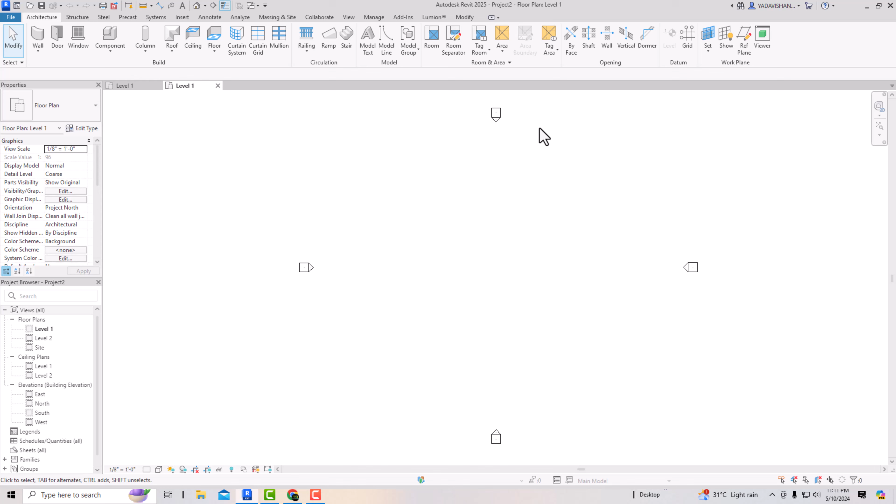If you click onto stairs and look at this definition here, it says: add a stair to the building model by creating common run, landing and support components. So I'm going to click onto these stairs, and I am at level 1 and level 2. There are only two levels here, and this one is site.

If you look at the components of a staircase here, the first one is run. The definition of run is that it creates a run of a stair by specifying points. So you can specify points to draw this staircase using run. This one is to add a landing in your staircase, and this one is to create a stringer or carriage by picking an individual path on a run or landing. So this one is to draw support.

In components we can find a straight staircase - how to make a straight staircase - and this one is full step spiral staircase, and this one is center-ends spiral, and this one is L-shape winder, and you can see here U-shape winder. So this is by default the components of staircase.

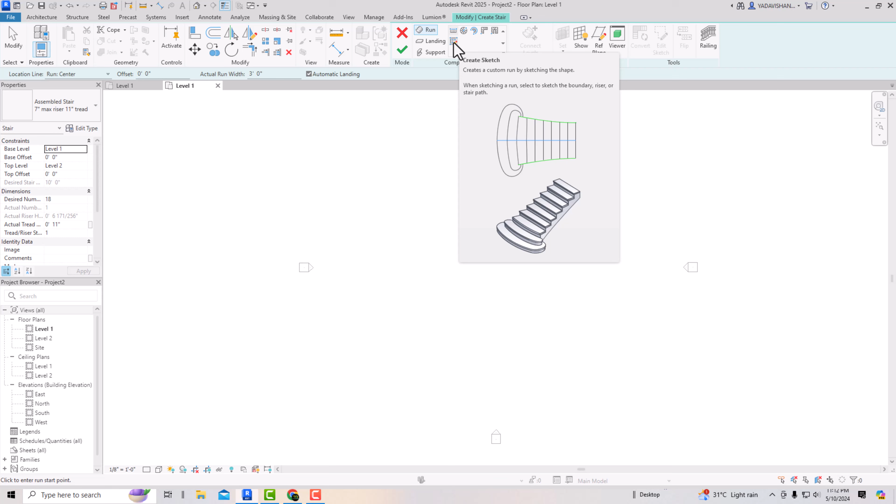And now the last one is create a sketch. So you can use this to customize your staircase using staircase by sketch.

Now I'm going to properties here, and you can see on the left side this one is assembled stair, 7-inch max riser, 11-inch tread. So you can find in properties there are some types of staircase. This one is assembled stair, and you can see here there is a monolithic stairs, and this one is precast stair, that means RCC staircase you can say, and this one is monolithic.

So both are almost same, but this one is like if you want to draw any assembled staircase of wood material or steel, you can use this one. So we will understand each one, and now I'm going to select this one only, assembled staircase, and you can see this is the base level 1 and top level is level 2.

So that means from level 1 to level 2 I'm going to draw a staircase. And if you look at the base offset here, this one is by default 0 feet 0 inches, and top offset is also 0 feet 0 inches.

So you can see the desired number of risers is 18. This is the desired number - this much of riser will be required by using this setting, 7-inch riser and 11-inch tread to reach to level 2. And you can see here actual tread depth is 11-inch.

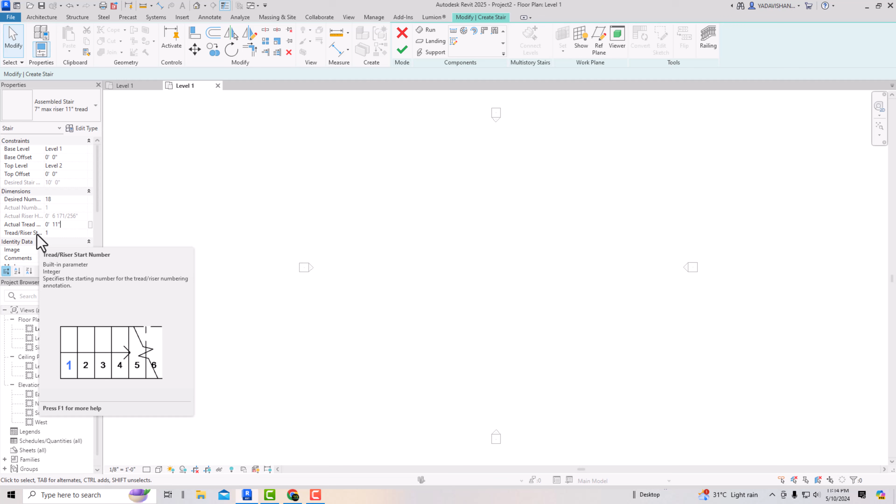You can change this here - you can make it 10-inch, you can make it 1 feet - and this one is tread riser start number, so this start number will begin with 1. So this is the settings of the properties of this staircase.

So now I'm going to select this assembled staircase, and I'm going to use this straight option to draw my staircase here. So I'm going to select this one, and now you can see this one is mode - finish edit mode - and this one is for cancel edit mode. So you can use this when you finish drawing a staircase.

And you can see here this multi-story staircase is not activated - I will tell you how to activate this. And you can see this last one, you can add railing if there is no railing in your staircase, but by default railing will be there. So later on also you can add railing.

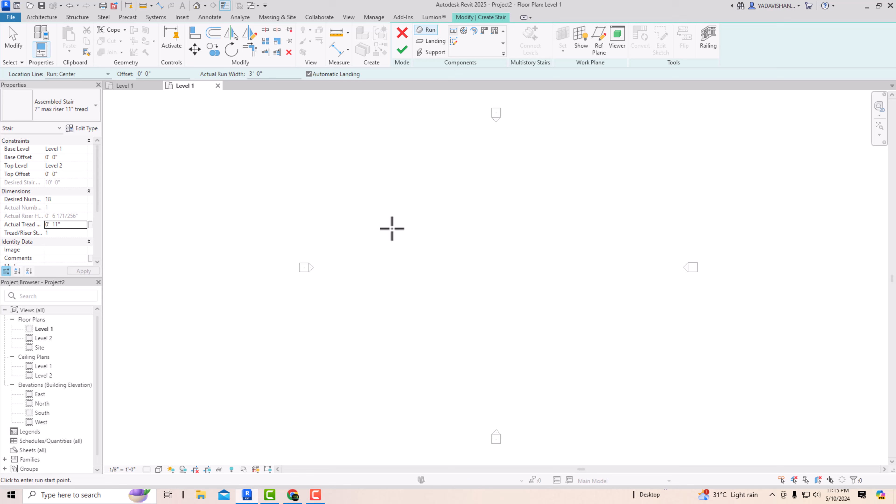So now I'm going to click with my left mouse anywhere in my viewport, and you can see here, if I zoom in, whenever I'm moving my mouse forward or backward, you can see the riser number is also increasing or decreasing. So you can see 8 risers created, 10 remaining.

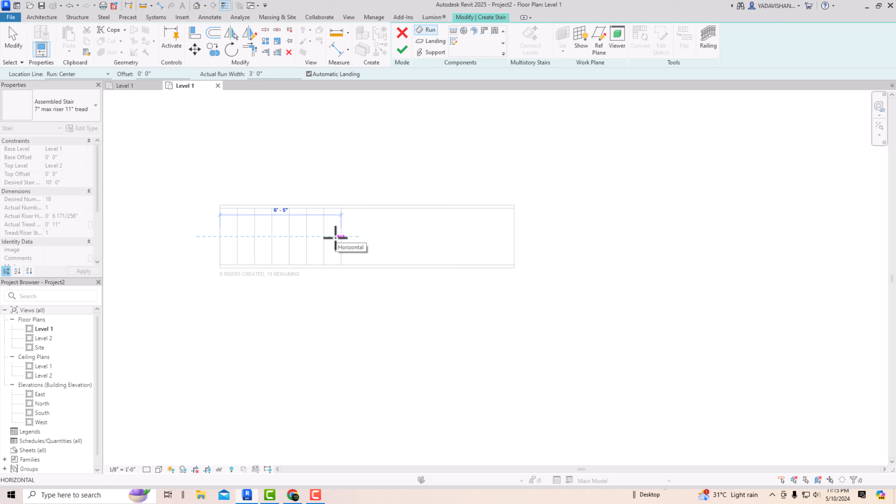You can see in this gray text in the down of this sketch here, 8 risers created, 10 remaining. And you can see if I finish this, the desired number of 18 risers is created, 0 remaining.

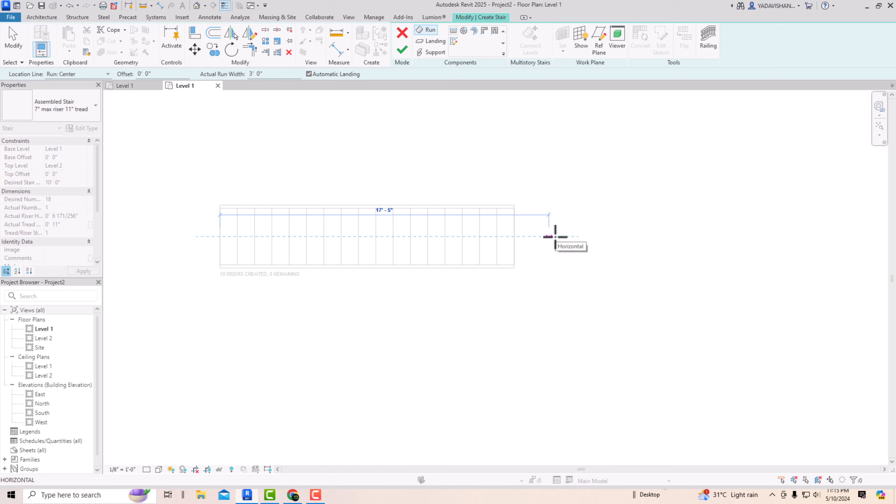So now you are about to finish this staircase. With the left mouse click, click outwards, and you can see this staircase is drawn. This is the assembled staircase. After that, use Finish Edit Mode, and your staircase is drawn.

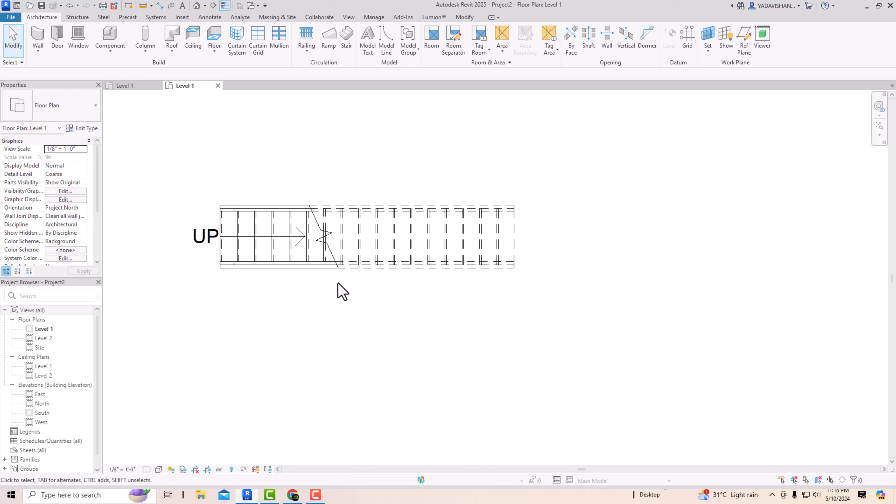Unlike AutoCAD, you are not required to draw this eye level line, so it is found automatically in Revit. This is for the section of the staircase, and after eye level this line should be in dashed line if you are studying architecture.

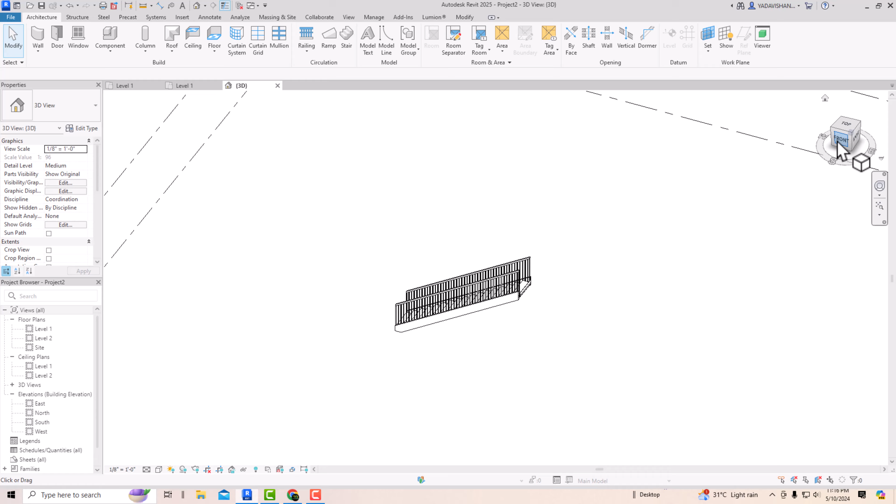So I'm going to my default 3D view, and you can see here this is our assembled staircase. You can view it in realistic mode also. This is our assembled staircase.

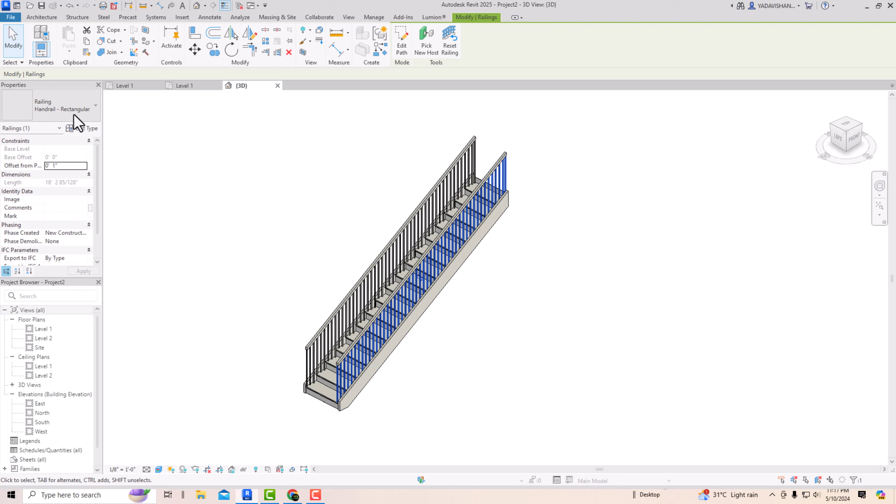Now you can remove this railing also if you want, or reset this railing, and change the railing style here if you want any other railing pattern. If you want a guardrail, you can use this guardrail also. Likewise, you can change the railing or delete it.

If you want to make any edit in your staircase, you can select from any view in the plan, 3D, or elevations, and change the settings there. Now you can go to Edit Type, click here, and you can see some parameters of the staircase.

Riser height is 7 inches, depth is 11 inches, and run width is 3 feet. By default you will find this, and you can see in calculation rules also there is an edit here, and you can calculate how much riser is required.

I will leave this, and you can see here construction run type: 2 inch tread, 1 inch nosing riser. If you click onto these three dots, you can change the tread material and riser material.

Suppose I'm going to change the tread material and riser material, but for that I'm going to create a duplicate here, a new assembled stair. This will be easy to work with in Revit. So always remember, just create a duplicate of anything if you want to change the Revit default models. This will avoid any confusion.

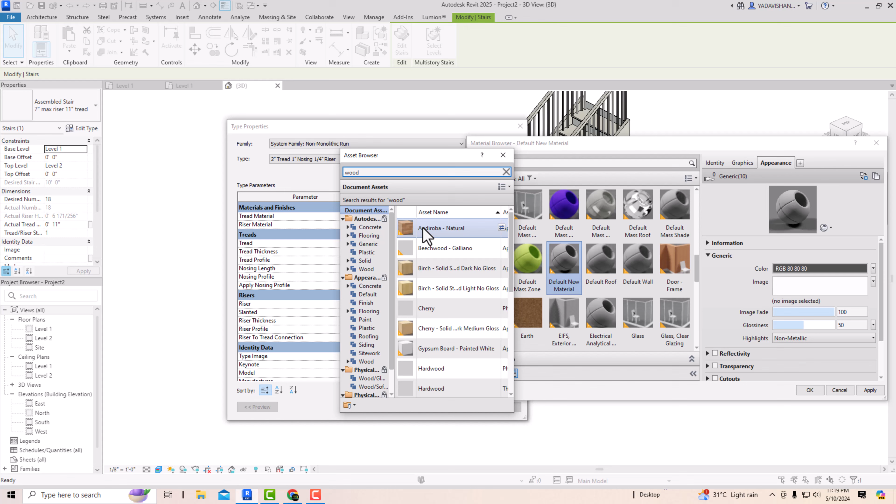I'm going to By Category, click on the three dots, and go to create a new material. I can go to the asset browser and type, suppose I want wood here, so I'm going for wood. You can select any wood material here, and I'm going to apply OK.

You can also change the riser material. I'm going to use the same material here, apply it as the riser material also, and you can see your material is changed here.

Now you can see here tread is ticked. If you uncheck this, the tread will disappear and you will not find it. So you can check it again and click Apply, and you will find the tread.

You can also change the tread thickness here. This is by default 2 inches; you can change it to 3 inches, 1 inch, anything. You can also change the tread profile here.

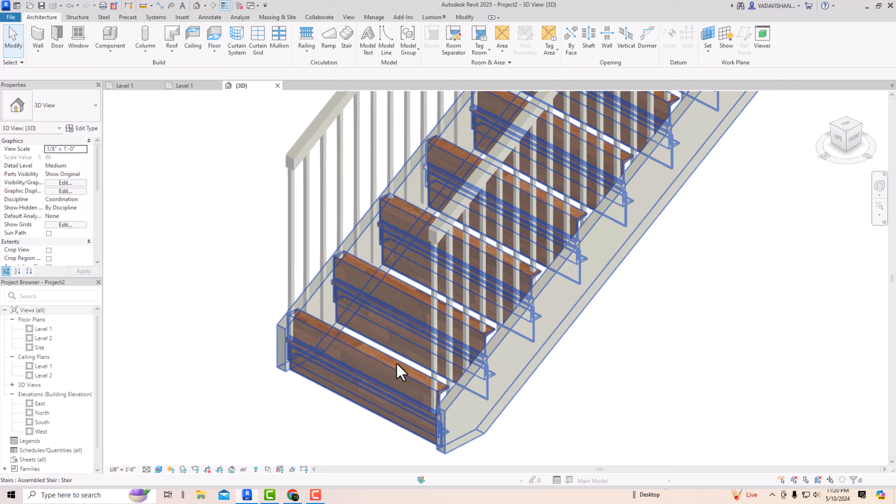This is the default, and if you click on this drop-down arrow, you can select any profile here. This one is C8X15. If you look here, the tread profile will be changed. You can see this tread profile is changed here; this is the C profile. I'm just showing you how to use this tread profile.

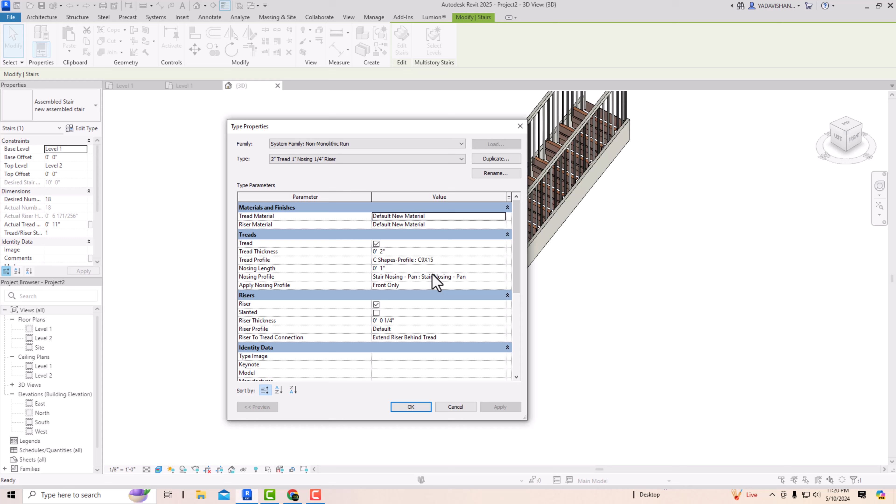You can also move to undo, undo again, and change this. Select this staircase and go to Edit Type, and you can see this is the new assembled staircase. You can simply change the tread profile here. I'm going to make this the default, click Apply, and this one will be default.

Now we can also change the nosing length here. You can make it 1 inch, 2 inch, depending on your design. You can see this is the nosing profile here; this is the nosing. The stair nosing is a pan here. You can make it C8X15 also, and set it as default.

You can also insert your own families here. If you learn advanced Revit, you will come to know how you can insert a nosing profile, and apply nosing profile front only. If you select this arrow, you can apply it to front and left, front and right, or front, left and right. I'm going to select front, left and right, then click apply.

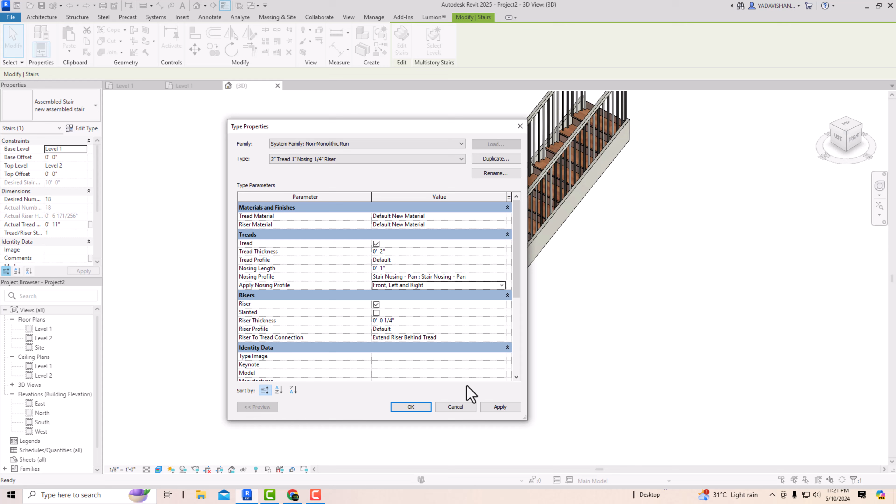So nosing will be applied to all the front here, and backward also you can see nosing is applied here. So if we move this here, you can see it is applied everywhere.

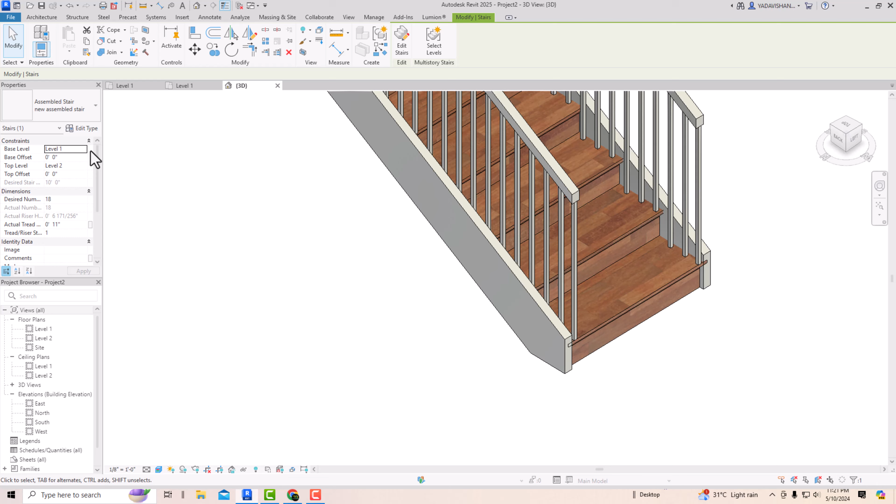So if you want to make any other settings here, you can go to edit type, and you can see support here. So you can increase or decrease the support. The right support is stringer closed.

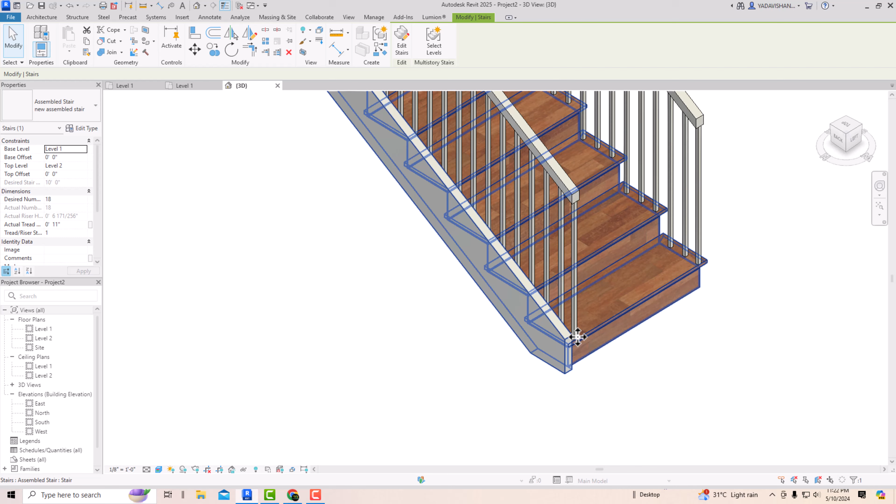I'm going to select this, and you can select carriage open, click apply, and you can see this is open. You can also select none, so none will be selected here, and there is no stringer. So again I'm going to edit type, select this staircase, go to edit type, and you can see right support is none.

So I'm going to make this again the same, stringer closed, apply. In the right support type, stringer 2 inch width, you can always change this. Section profile is default, and you can select this C profile here if you want, and this one will be changed to C profile.

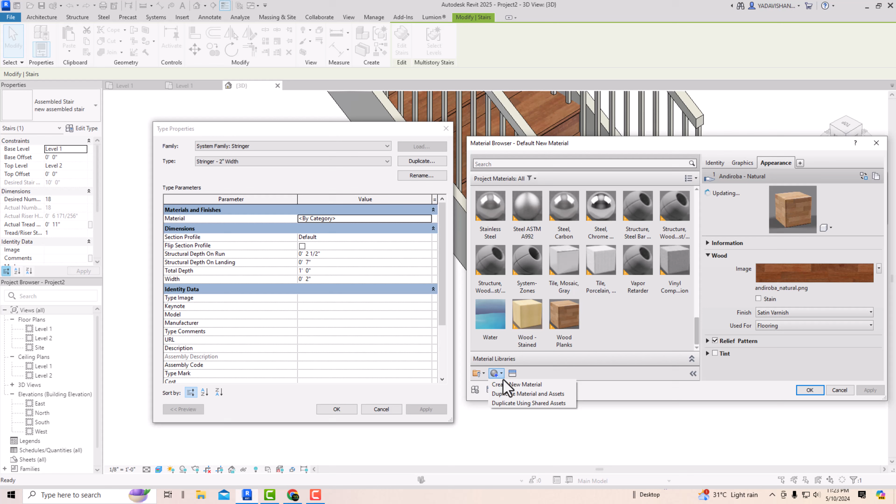You can also make this as default here. You can change the material. So suppose I'm going to change the material of this support here, the stringer. I'm going to create a new material, go to asset browser, and now type steel here, so I want steel support here. We can select any color of steel, click apply, and you can see this is changed here.

Likewise you can change the structural depth on run, and total depth here, width here, and you can also use this flip section profile. You click apply, and this one will be flipped here.

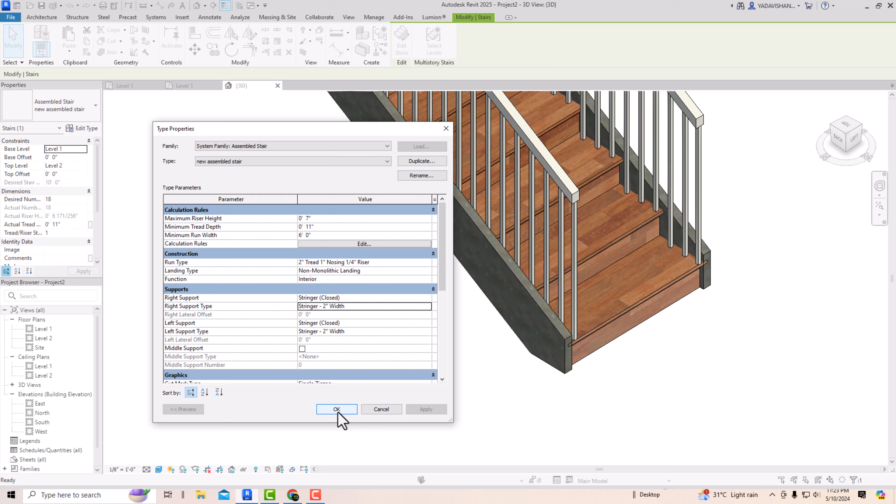Likewise you can use these settings for all staircase designs here in Revit. You can use the same techniques of changing tread and riser, materials and railings, and profile and nosing. So this is about how to draw an assembled staircase.

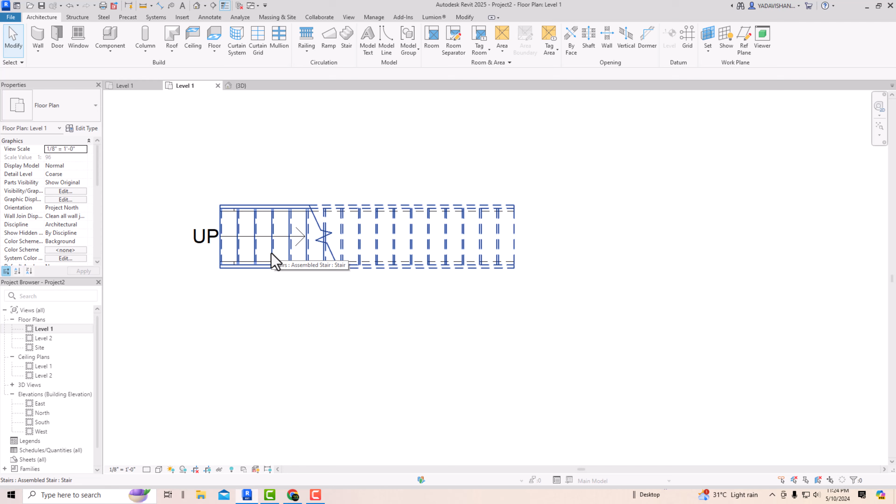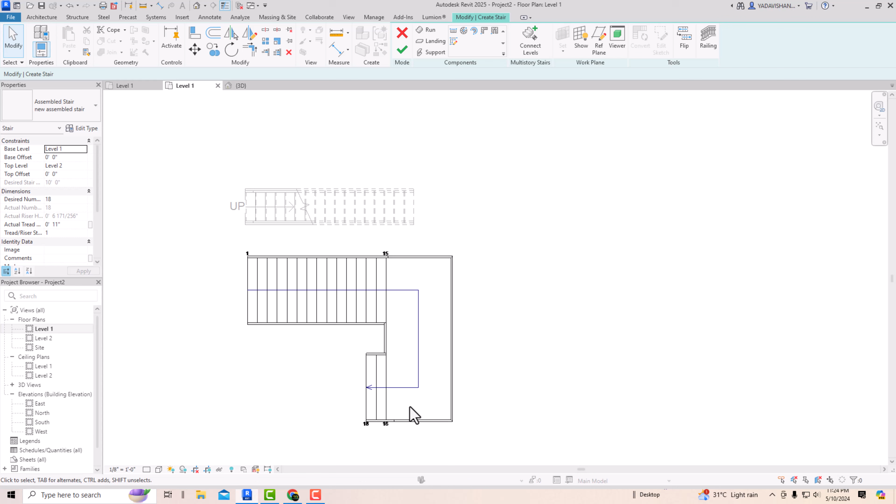Likewise you can go to stair again, and try to draw this new staircase here, a new assembled staircase, and you will find the width of the staircase is changed here. You can draw any shape here. Suppose I'm going to start from here, and this is the pattern I'm going to draw. I'm going to finish this, and you can see this is a change in design.

Likewise you can practice this assembled staircase, and you can draw any other shapes also. You can change the width and thickness.

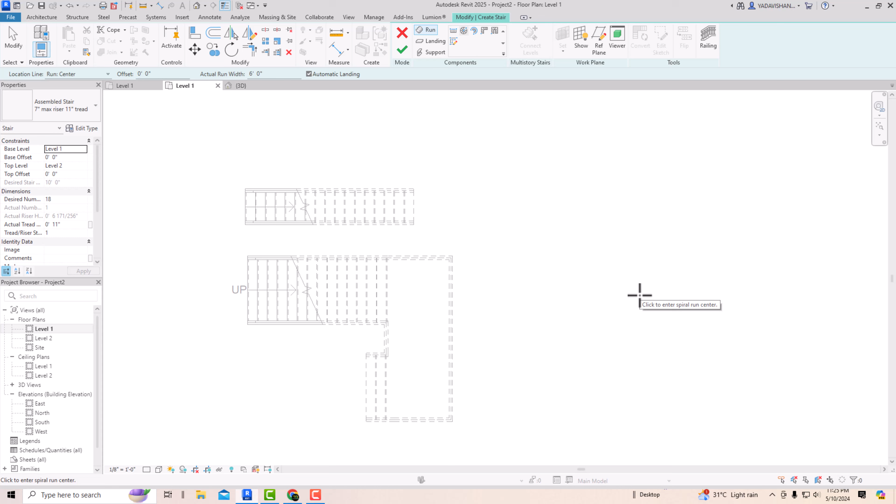So next you will see here, this one is a full step spiral staircase. I'm going to again select 7 inch or maximum riser, 11 inch default here, and go from level 1 to level 2. Now I'm going to select this full step spiral staircase, and select onto this any point here, and if you increase and decrease, you can see 18 risers created, 0 remaining, and you can draw this as per your design anywhere.

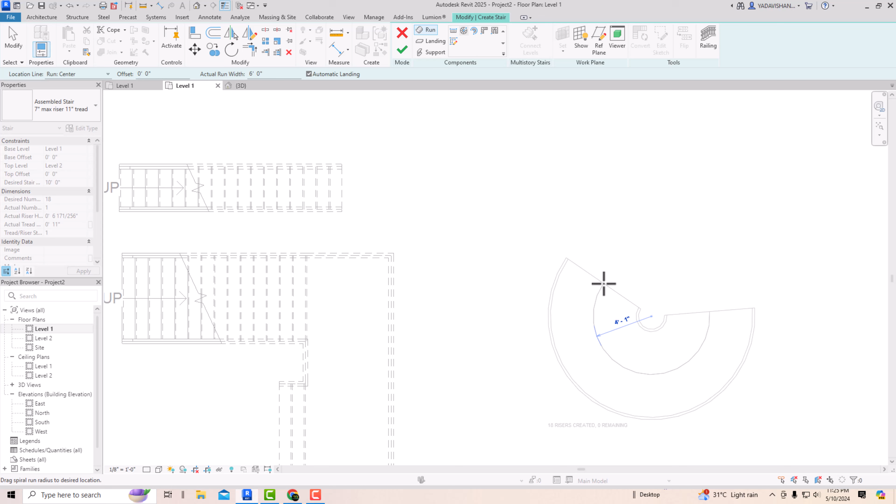So you can increase or decrease this radius here. You can see this radius is guiding us, so how much radius you want for your spiral staircase. I'm going to use this one, 4 feet 1 inches, and now I'm going to click once more. You can see our spiral staircase is drawn here.

Go to finish edit mode, and if you go to 3D view, you can see this is our spiral staircase drawn here, and it is using the same material of tread and riser.

You can do some more settings in this spiral staircase, so I'm going to select this spiral staircase, and go to edit type, and you can find this middle support here. You can also give middle support to this staircase, just select this, and if you select middle support, now it is asking for the middle support type.

So this carriage 2-inch width. If I'm going to click apply, okay, so if you'll see middle support here, you can see this is the 2-inch middle support here. You can find this middle support, so this is called middle support. And also you can select this here, and go to edit type, and you can change this.

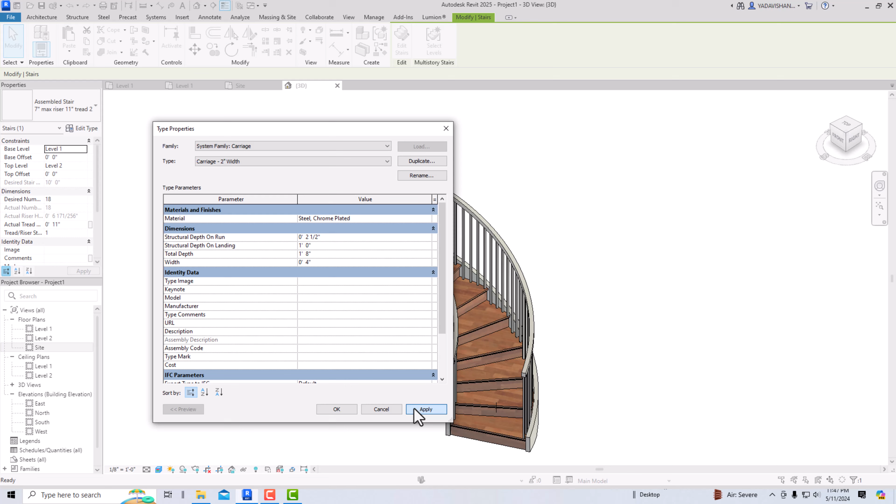You can change the structural depth on run, the structural depth on landing, and also change the material. Suppose I make the material steel, and for structural depth I make this 1 feet on landing. Total depth I make 1 feet 8 inches, and width I make 4 inches. This is just to make you understand. I'm going to click apply, okay. So you can see this is changed here - 4 inches, and 1 feet depth at landing. So likewise you can do these settings.

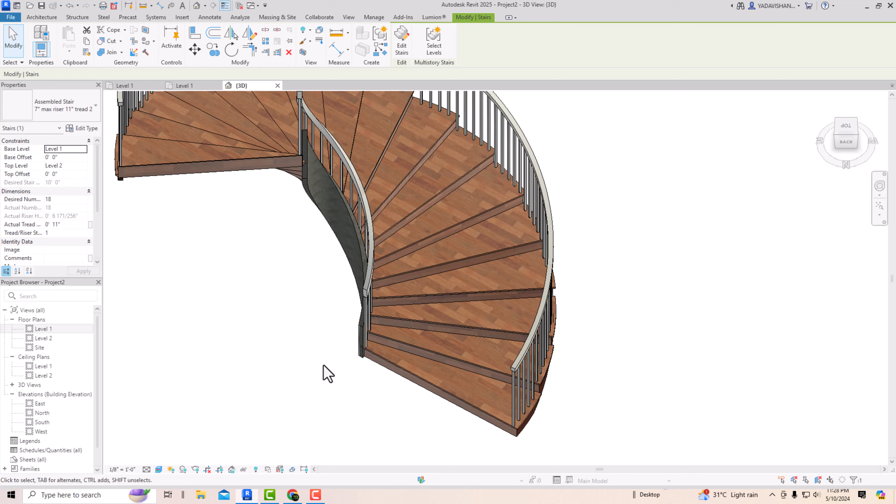Now I'm going to the next one, this is center end spiral. This creates a spiral by specifying the center point, start point and end point. So you can find the center end by specifying a center point.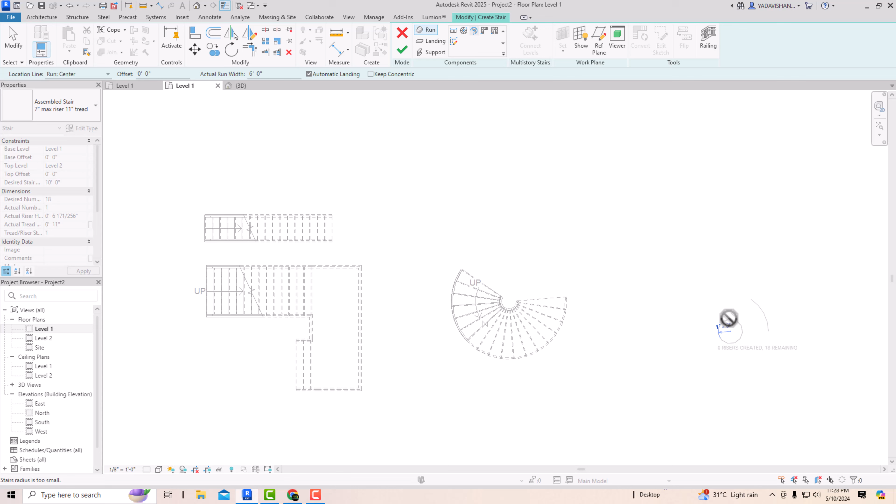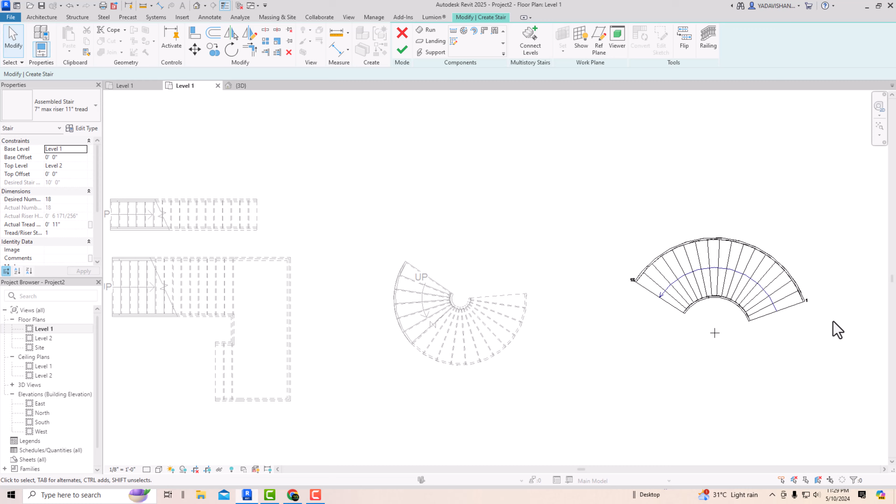Suppose I'm taking this as a center, and now I'm going to find a center here. So I'm going to find a start point here. Suppose I'm using this as a start point from the center, it is 7 feet. I'm going to click onto this, and now move my mouse to the left side, and you can see 18 risers created, 0 remaining. Just click once more with the left mouse, and you can see this is created - the center end arc staircase.

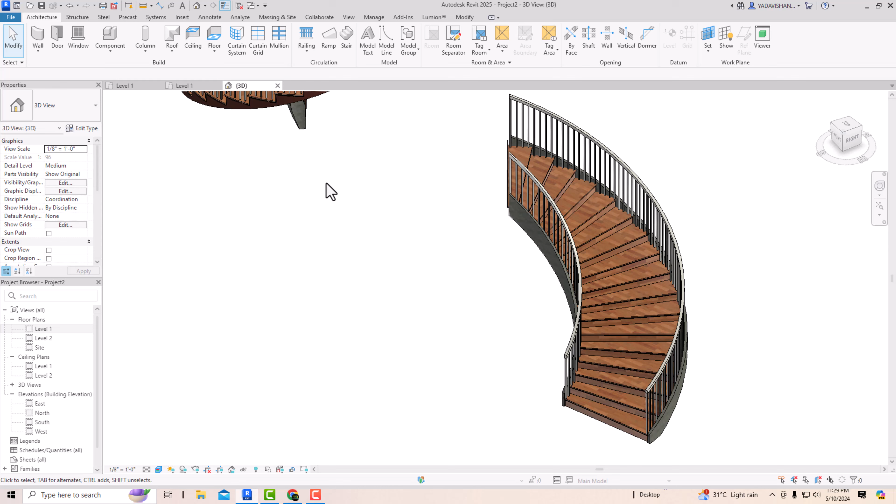You can just finish this, and go to 3D view, and you can see here this is the center end arc staircase. So you can use this in your design to make a beautiful curved staircase, the center end arc.

So next you can see here this setting is almost same here. You can create a duplicate and do these settings. This is almost same here.

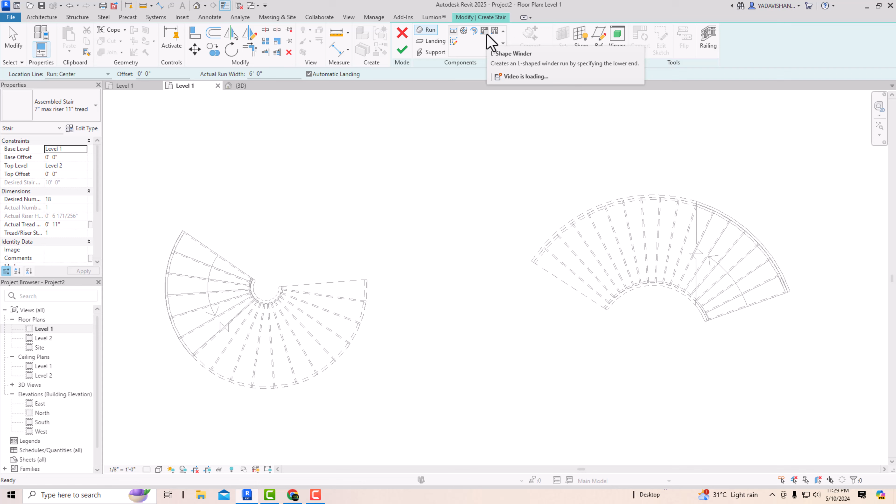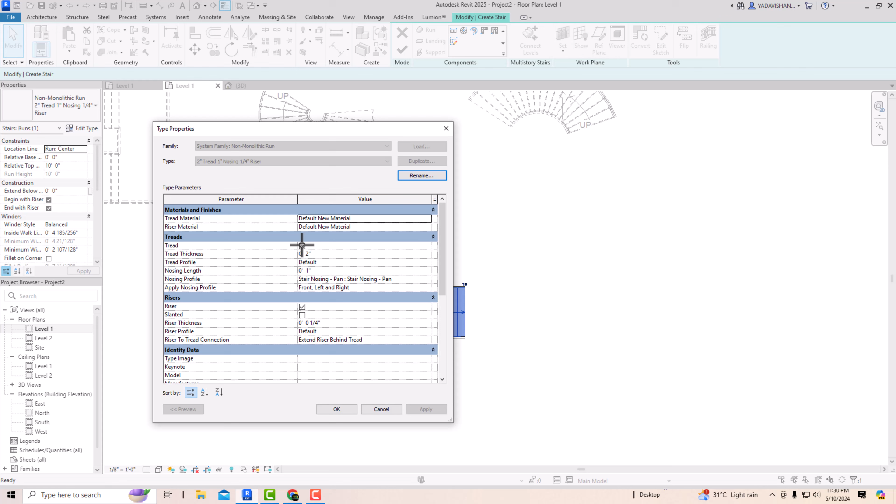So now I'm going to this staircase again, and you can see here L-shape winder. I'm going to select L-shape winder here. This is one is default. So you can do these settings here - you can edit type, create a material for tread and riser, you can change this, you can hide the tread if you want, and the rest of the setting is same. So you can use this in your design.

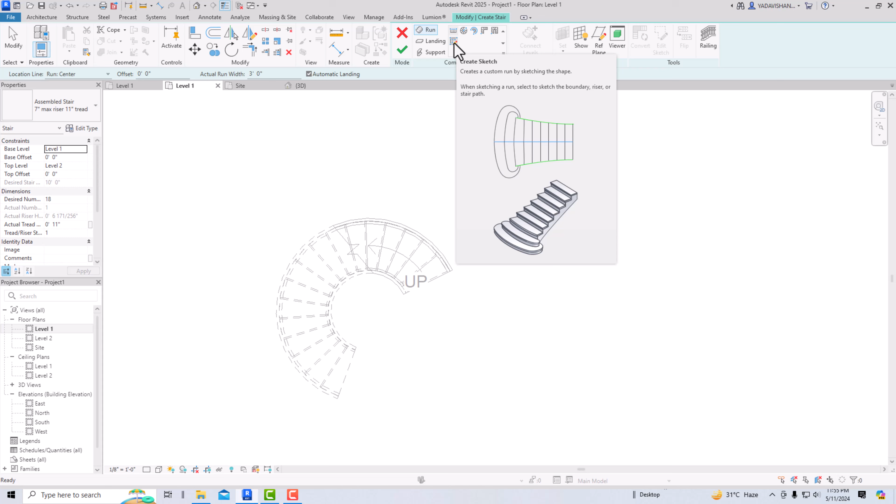So now I am going to start with how to draw a stair by sketch. If you go to stair here, you can see this term - stair by sketch, this pencil icon. If you select here, you can use this to create a sketch of a staircase, and it will use to make a custom staircase. So I'm going to select this.

Now you can see there are 3 terms. Boundary is the first one - sketch line to define the boundary of a run of a staircase. So if you are drawing boundaries, you can start drawing risers, and if you are drawing risers, you can start defining your boundaries. Riser is used to draw riser, and this one is to define the path of a staircase. Without this you cannot draw a staircase in the sketch method.

So I'm going to first select riser here. I'm going to start with riser. You can see this is the non-monolithic run, 2-inch tread, 1 inch nosing, 1/4 inch riser. You can see here relative base. You can do these settings later on.

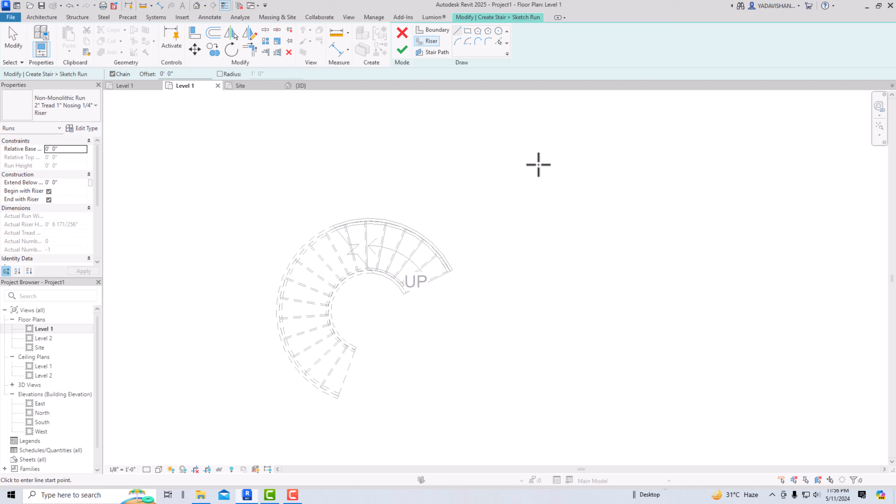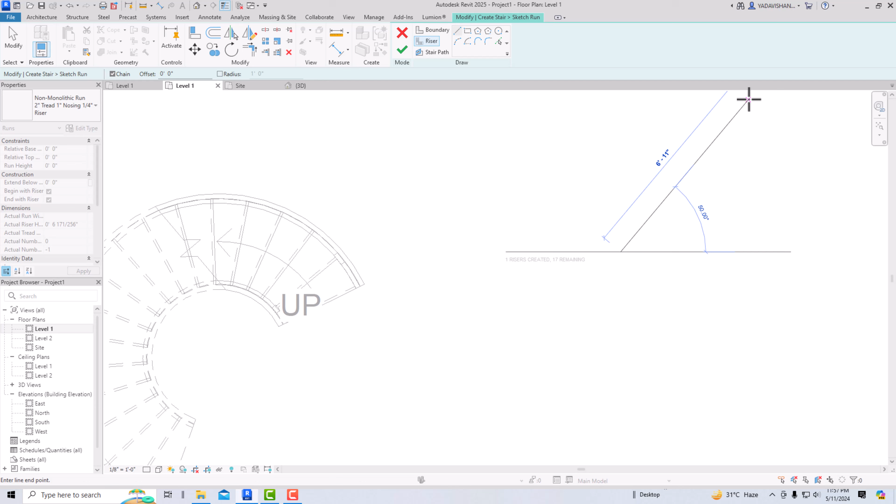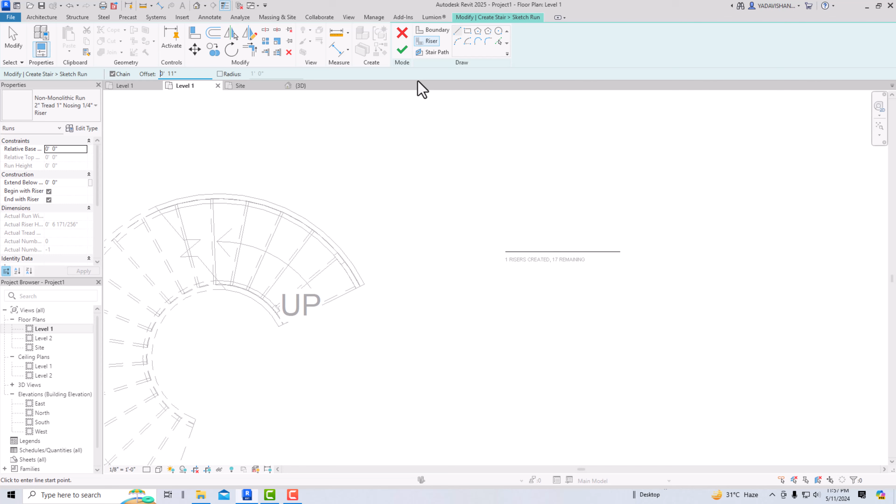So now I'm going to use this riser again. You can select riser here. Make sure every time riser is selected, otherwise by default the boundary will be selected. So you are required to make sure riser is selected, and you can see here offset is 0 feet 0 inches. I'm going to give a riser offset of 11 inches, which is standard. Now we can use this offset here - just make this offset of 11 inches, and you can start making offset here. So however much riser you want, you can start drawing. We are requiring one riser created, 17 risers remaining, so total 18 risers we are required.

So I'm going to go 1 2 3 4 5 6 7 8, and now I want landing here. For landing I'm going to give an offset of 4 feet here. I want a 4 feet landing, so I'm going to draw a 4 feet landing. Because this is a staircase by sketch method, you can make your custom riser and landing here.

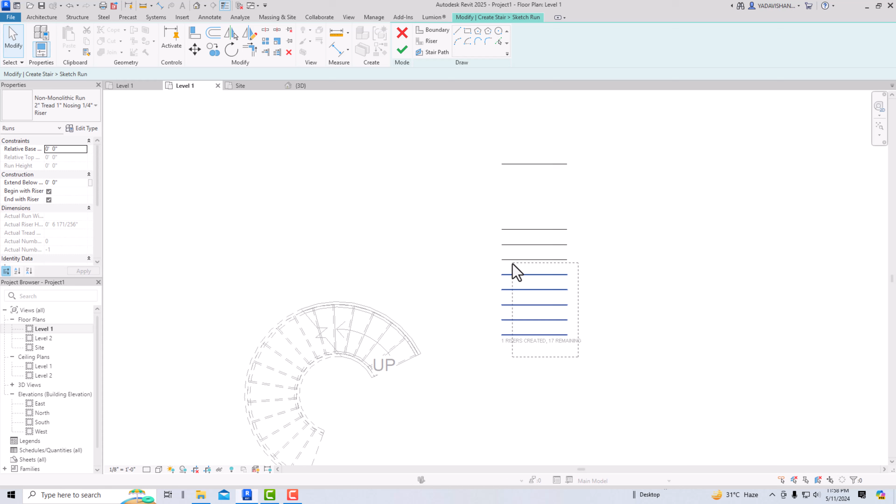Suppose I'm going to mirror this. I'm going to select this, or you can move this also. I'm going to copy this, and I will move this to this place. So I want a gap of 1 feet 2 inches. That is okay.

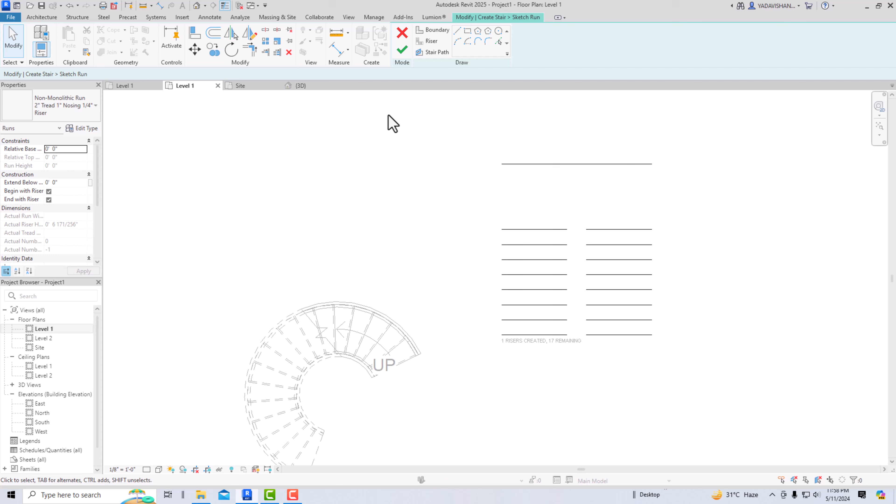So now I am going to use this till here. You can see here, so now we are ready to draw our landing. First we will start with the boundary here. I'm going to select boundary, and now I'm going to define the boundary of this staircase. We will start drawing boundaries.

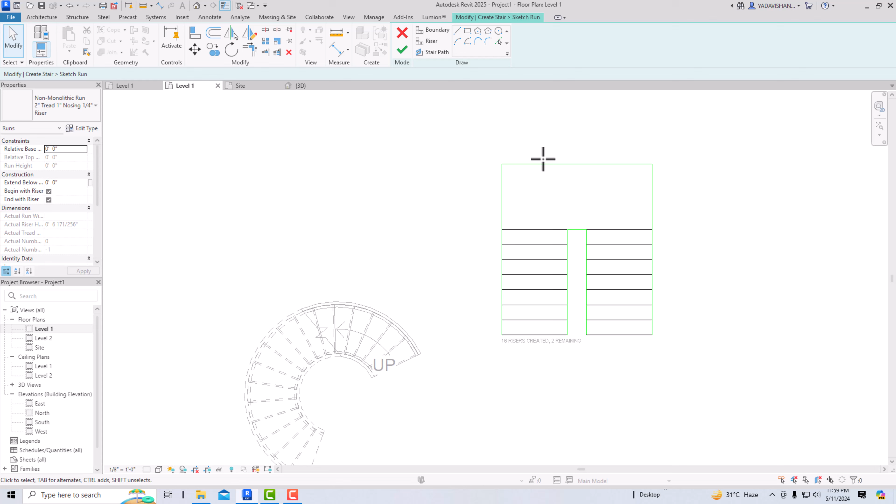And you can see here this is landing. I will just delete this riser here because we don't require it, and we'll draw a boundary here. So I just wanted to confirm that this is 4 feet. This is the boundary, this is the riser in the black line. This is used to draw a riser, and if you see a green line, this is for defining boundaries. So the next important step is that you are required to draw a stair path.

I'm going to select this, and now I'm going to draw a stair path. I'm going to take this till here, then from here, and then here. So now I'm going to finish edit mode, and you can see here this staircase is drawn here. So you can see this is a staircase by sketch method.

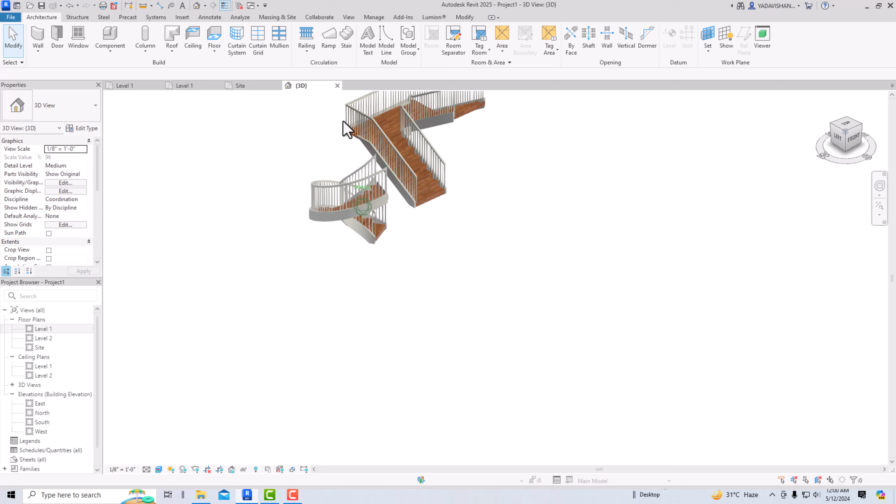So if you look at this 3D view here, this is our staircase by sketch method. Likewise you can draw any staircase using a sketch method, and you can do some more settings. This video is getting longer, but it will give you benefits for the long term.

So I'm going to select this staircase, and now if you want to edit again, how will you do this? I'm going to select this staircase, and you can see here edit stairs. You can also select levels for multi-story stairs. I will come to that later here. So you can change here also.

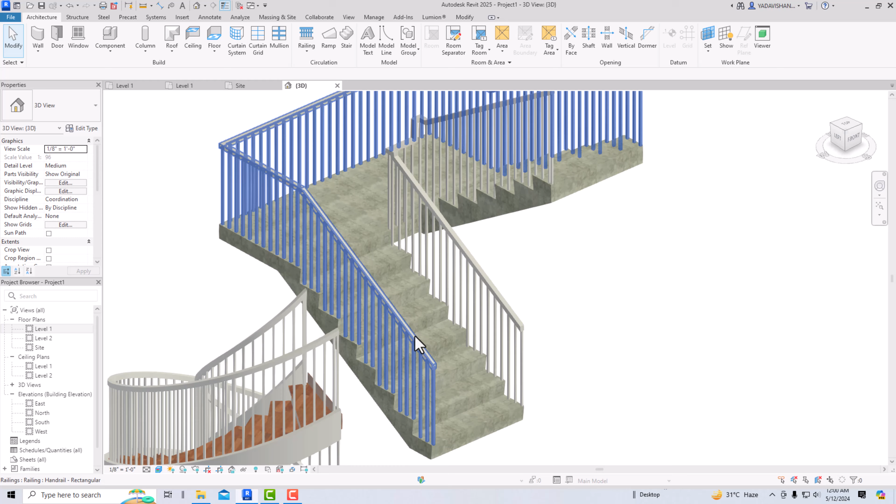So this is assembled staircase. I'm going to select precast staircase. So you will see a precast staircase here. You can see this staircase is precast. Generally we'll use this only for our RCC designs here.

You can change the railings, same like in spiral staircase. You can change any handrail here. You can go to handrail pipe. You can also use handrail pipe here.

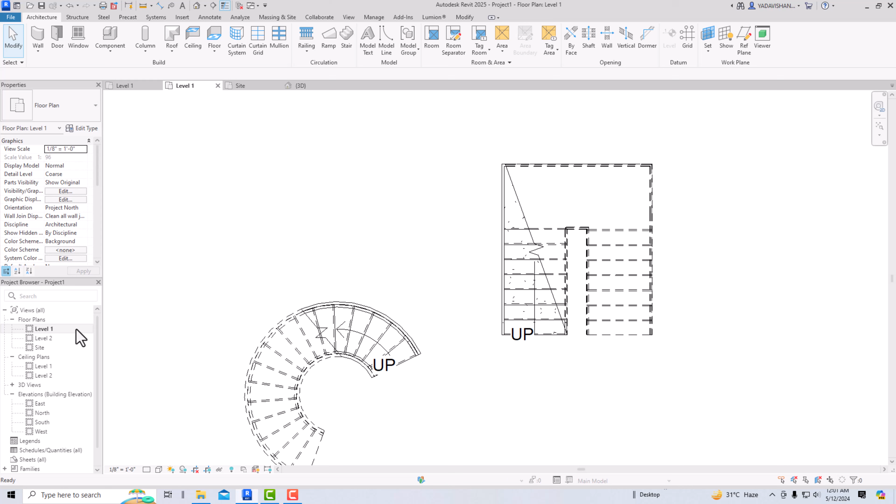Likewise you can change the railings, and if you want to edit sketches, you can go to edit staircase, and you are required to again select this staircase here, and you can go to edit sketch. You can also flip your staircase, so this will flip the sides of a staircase.

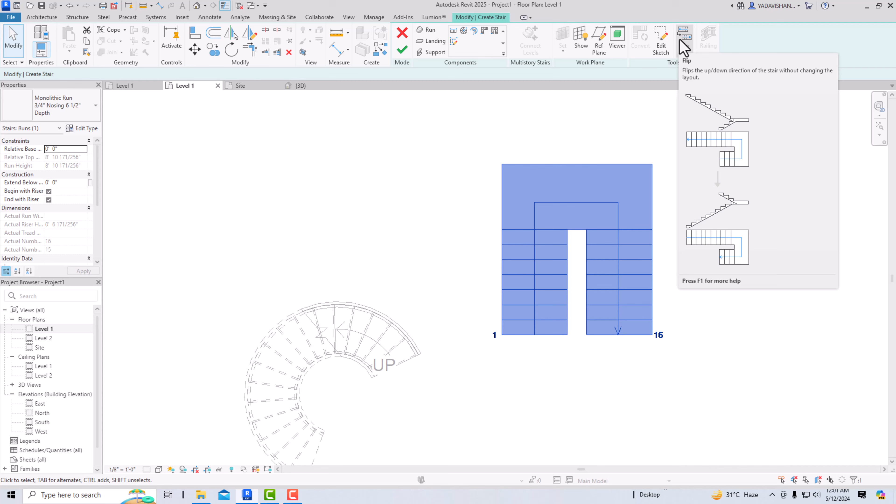So if you select this flip side, this will go here. Again if you click flip here, this arrow will go here. Likewise you can use it. Again if you want to make edits, you are required to select this staircase and go to edit sketch.

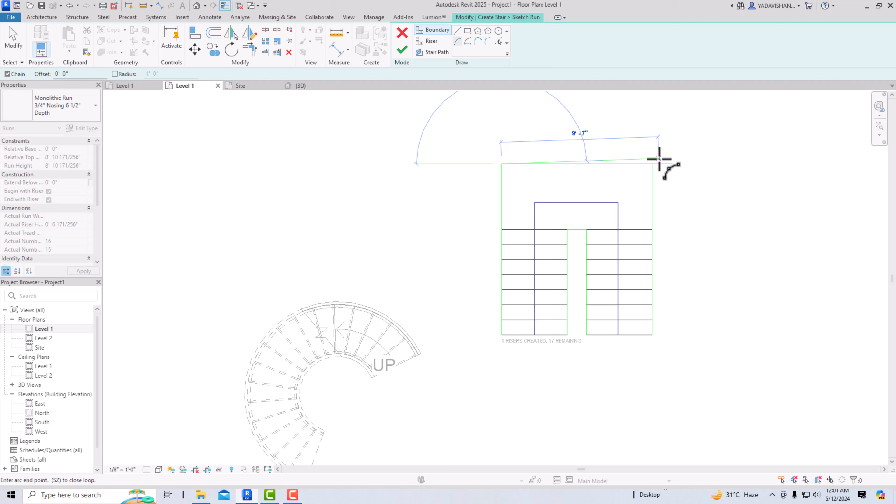And now I want this to be a curve, so I'm going to delete this, and I will use this arc here, and I want my landing to be like this. You can see here this is edited, so you can see this is our landing here in the curve shape. Likewise you can make a staircase using the sketch method.

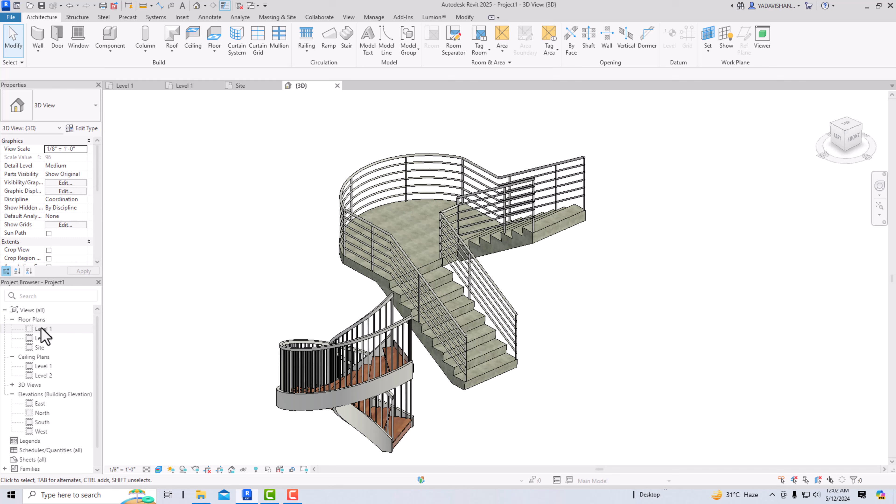This is very handy, and you can also do further settings here, the same like a staircase. You can create a duplicate, you can change the riser height here, you can change the depth here, run width also you can change it from here. But before drawing this sketch, you are required to do these settings.

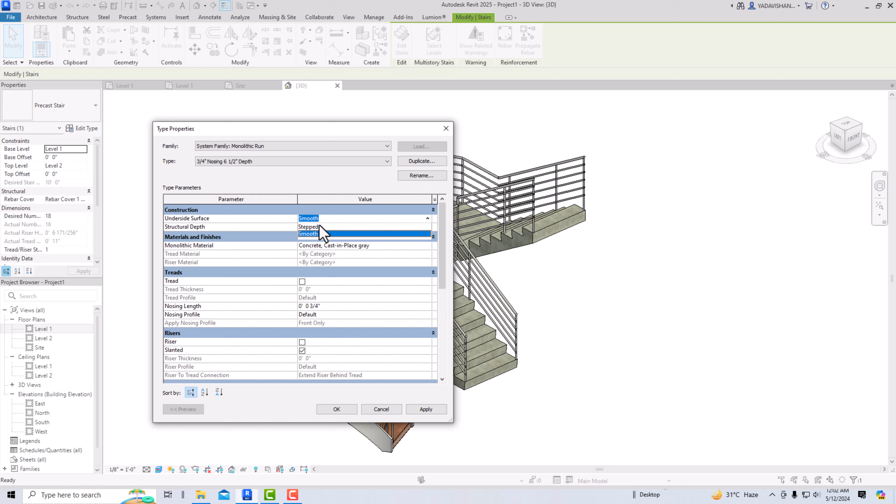And you can also use this run type. You can go to this run type here, you can select this underside surface is smooth. So if you want folded plates, you can go to step, click apply, and this will convert to a stepped staircase. If you want to draw a nice folding plates staircase, you can use this method. This is very easy and it will look nice in your interiors.

Again, you can change this to smooth. From stepped, you can go to underside surface, you can make it smooth again, click apply. And you can also change this material here.

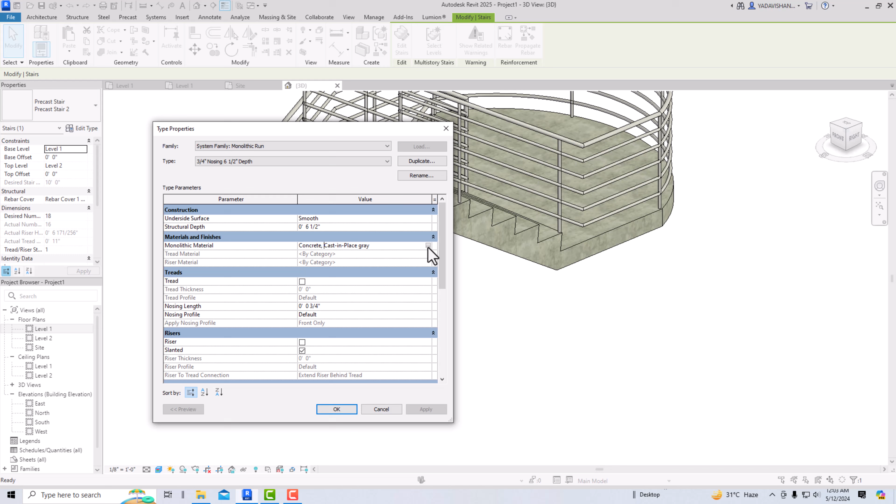You can create a new material by clicking on these three dots. I'm going to create a new material, so I'm going to use any marble, or you can use this stone. Suppose I'm going to use the stone.

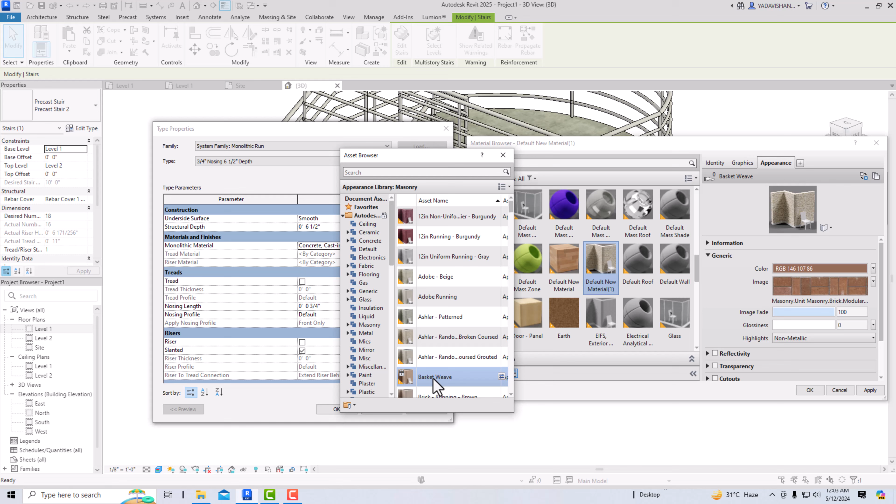You can select here masonry, you can select any paint here if you want. I'm going to use this one. Click apply, and you can see this material is changed here.

You can also change the landing type, it's 8 inch thickness, so I'm going to make this a 6 inch thickness. You click onto these three dots to change the thickness here. Suppose I want to make this a 6 inch, you can also change this monolithic material. Click apply, okay, and this thickness is changed here.

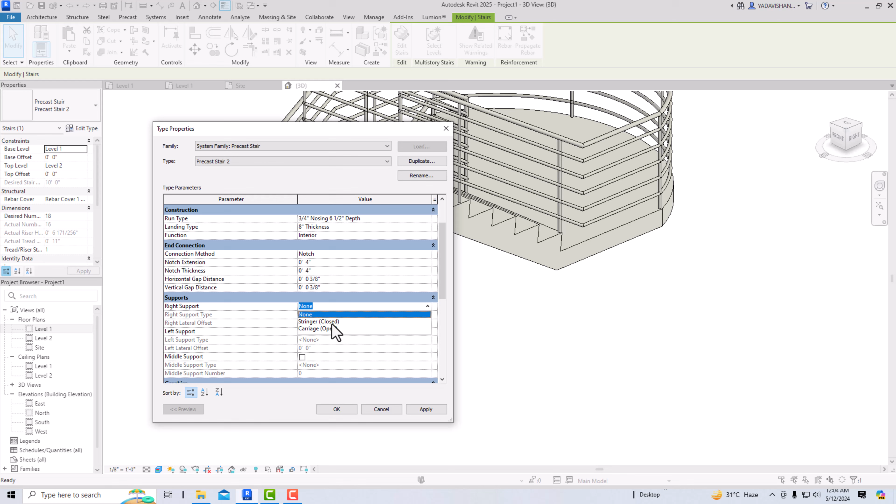You can go to edit type here, and you can see right support is none, so you can give any right support here. So you can give stringer, closed, apply, okay, and you can see this right support is with a stringer.

Likewise, you can go to edit type, run type, click onto these three dots, and you can use this tread material if you want to change this. Click onto this three dots, and you can change this tread material, like a spiral staircase. So I'm going to apply marble here.

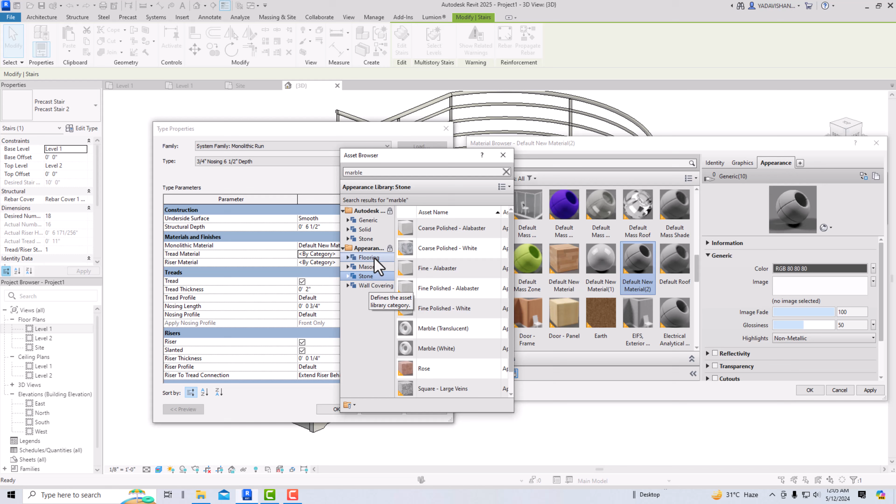So I'm going to apply marble, we'll look for any marble here. I'm going to apply this deep green, okay, apply, and you can see this tread material is also changed. For riser also you can do the same thing, you can apply the same material, click apply, okay, and rest of the settings are same as the staircase.

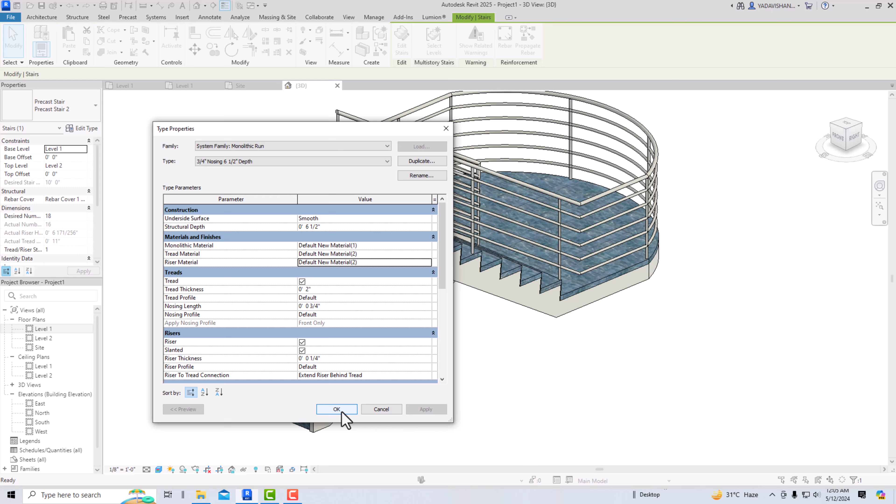You can change the nosing, you can change the stringer, you can change the railing. Likewise you can use this staircase by sketch method. So this is the basics of staircase, you can see here.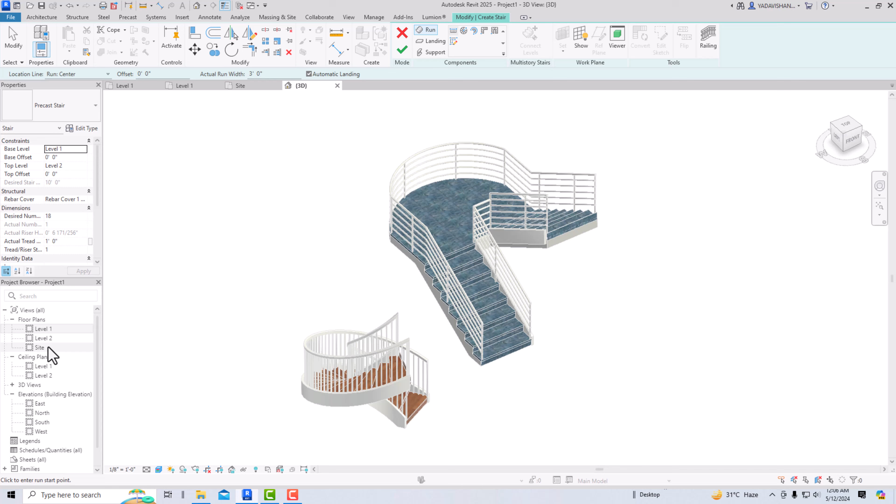We need to understand all these terms here, and you can also use this landing to add a landing in any staircase. Suppose I'm going to my level 2 here, and I want to add a landing. So you can use this pick two runs, start drawing this, create a sketch. I'm going to draw a landing here, suppose I want a landing here, just to make you understand.

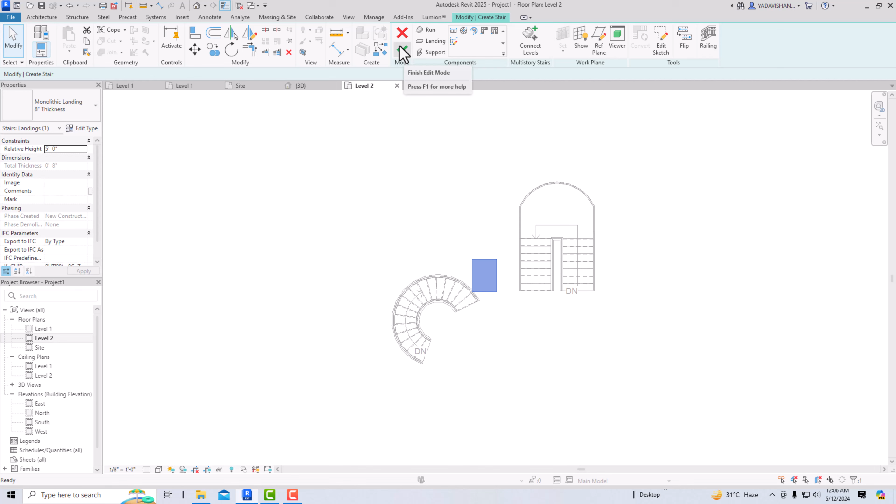If you go to this, you can see this landing will be added to any staircase. So you can finish this, and the landing will be like a railing. Later on you can edit or delete this. Likewise you can add landing if you are missing it. Generally in these sketches it will be done automatically, but sometimes you may require to add a landing in your design.

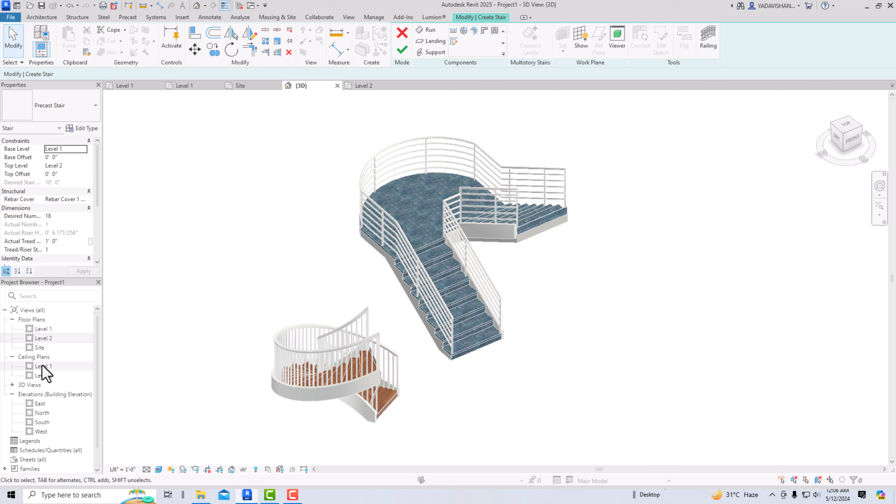Now I will come with some interesting settings, how to add staircase to multi-level. Suppose this one is level 1 and level 2. If you go to elevations, there are only 2 levels.

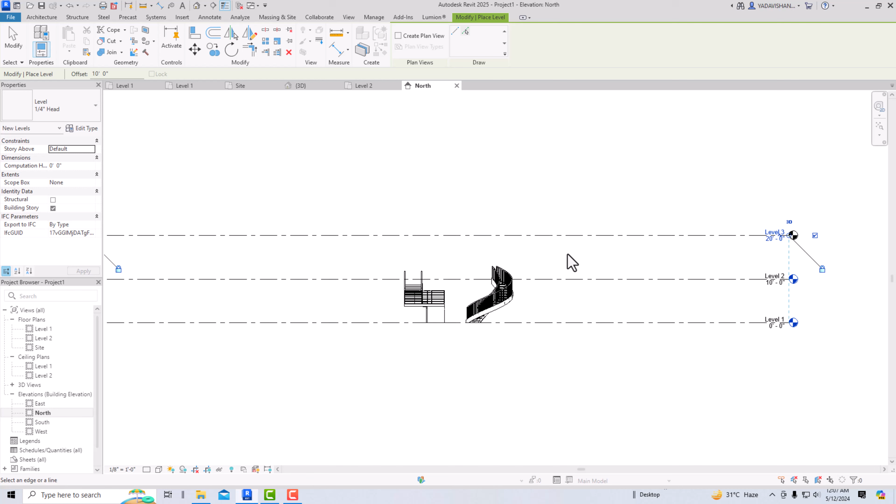So I am going to first draw some levels here. I will use pick lines, and I am going to give an offset of 10 feet for each level. So I am going to draw some levels for a multi-story staircase.

Now I want to save my time, so I'm going to select this staircase here. You can select it from 3D view, or your floor plan view, or in elevation view. I'm going to select this in elevation view, and you can see this icon here, select levels.

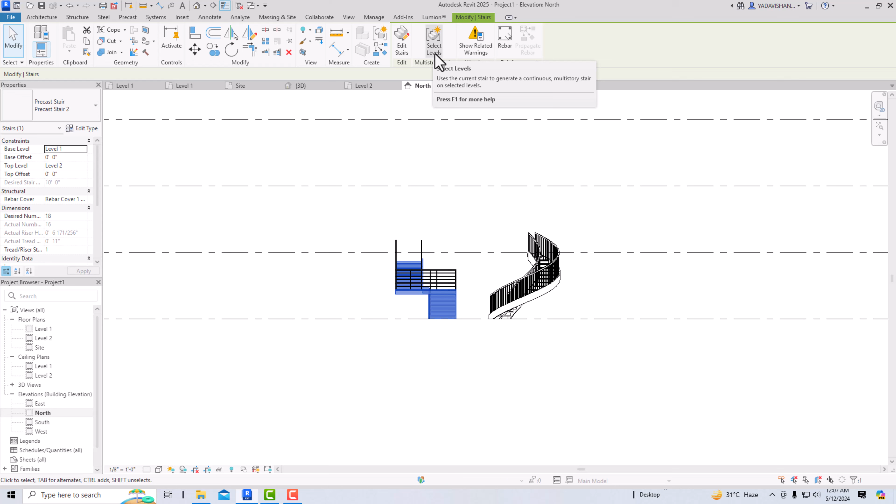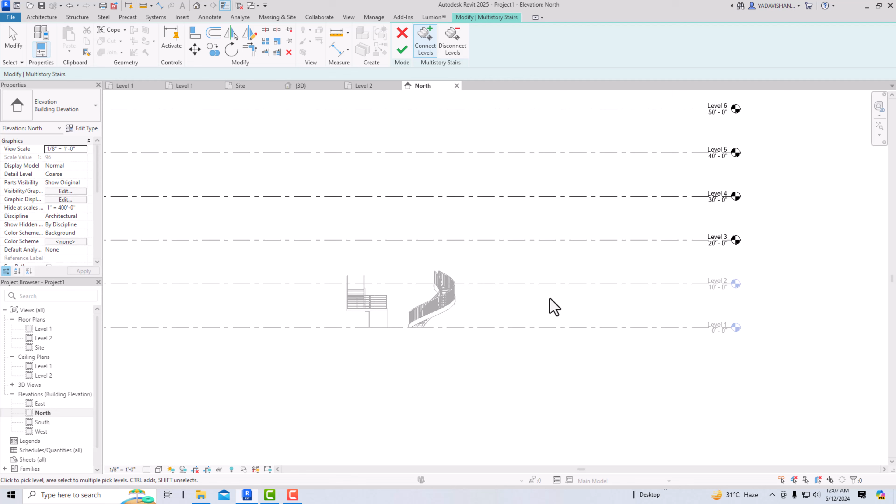So I'm going to use select levels, and now it is showing connect levels and disconnect levels. For connecting levels, you are required to select the levels here. You can see these are all faded levels here because these are all already selected. You can see these dark green lines of levels.

So you can select this. I'm going to first select this one, and now I'm going to press Ctrl, and I will select all this here, and I'm going to finish edit mode, and you can see this staircase is added to the multi-level.

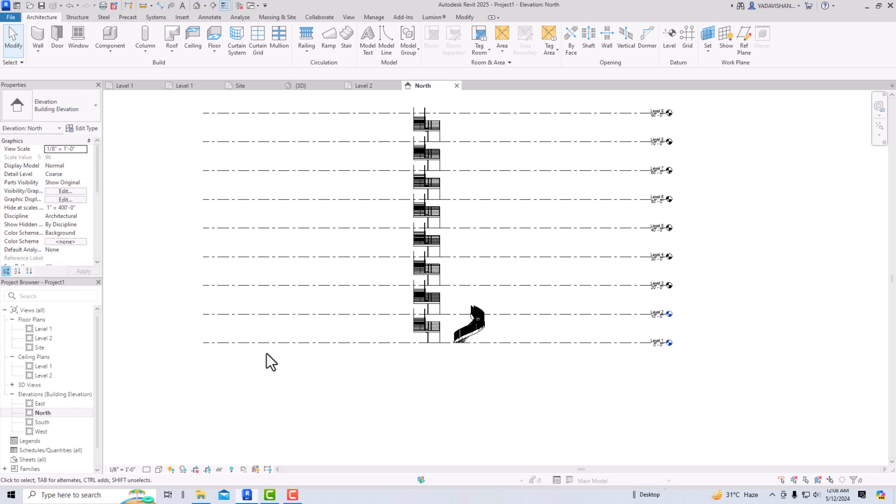So we can go to 3D view, I can see these are all added to your level. When you start drawing a multi-story building like apartments, this will be very handy. So this is the method of drawing a multi-level staircase.

So this is the basic knowledge of drawing a staircase in Revit. Hope you have liked this tutorial.